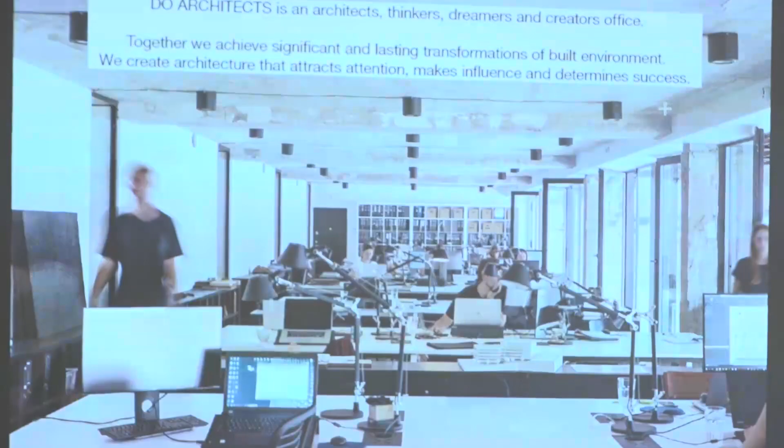So, actually the office Do Architects is the office of thinkers, architects, dreamers, and creators. We have written this motto for ourselves: together we achieve lasting transformation and significant built environments. And we try to always create architecture that attracts attention, makes influences, and determines success.

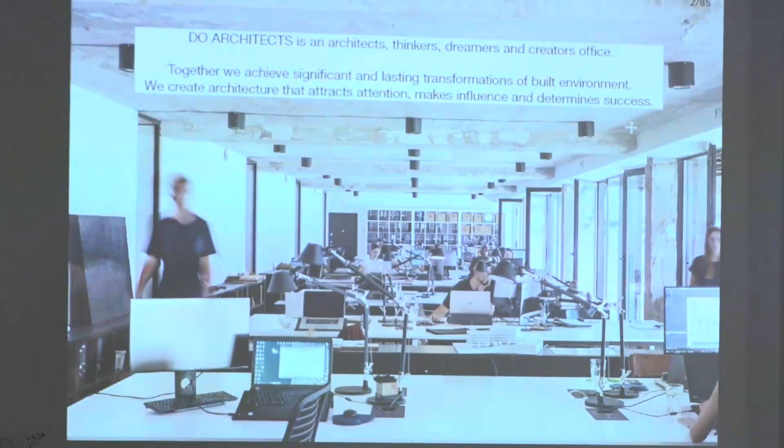Now in our office there is more than 30 people, 34 or 35 people working there. So it's quite a big company for Lithuanian scales. And I personally joined the team. I was invited to become a partner in 2015. And now my focus is more on architecture theory, on creative processes, learning processes.

I started teaching in Vilnius Technical University, teaching architecture, and I have already been invited and been a teacher in 3 workshops in 3 different countries already this year. So it's quite a new field for me, teaching others about architecture, but I find it very interesting, inspiring. You learn so many new things, rediscover some stuff, sometimes understand how easy it is to make something and how complicated it is to explain to people who have a totally different point of view. It also helps you open up your mind and try to see things from other perspectives.

Our office is, as I said, quite big, 35 people, and we're quite horizontal. Of course there are project leaders, partners, architects, assistants, but we work, as you saw in this image, this is our working space. Our office is subdivided into a couple of areas, but our office space is one big area, so everybody knows what all the rest of the people are doing at the same moment. It's quite noisy sometimes, but it helps to feel this rhythm of the office, so if you hear somebody discussing an interesting topic you can add to that, or hear something new, maybe some law that just changed. Or you could use headphones just to concentrate on work individually. Also there are some smaller rooms where you can go and work individually in total silence.

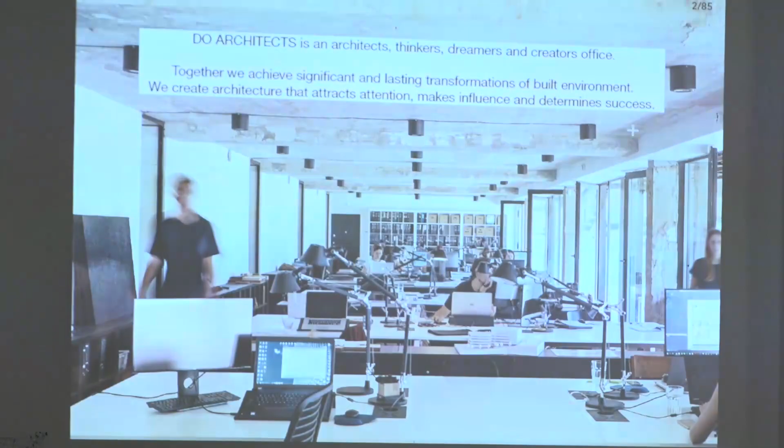And it's quite a big office, there are quite many of us, and actually the office is quite young as an architecture office, but we have already done and have been doing quite a lot of projects. Just recently, a contemporary art museum opened in Vilnius, and we were working together with Daniel Libeskind Studio to realize this project.

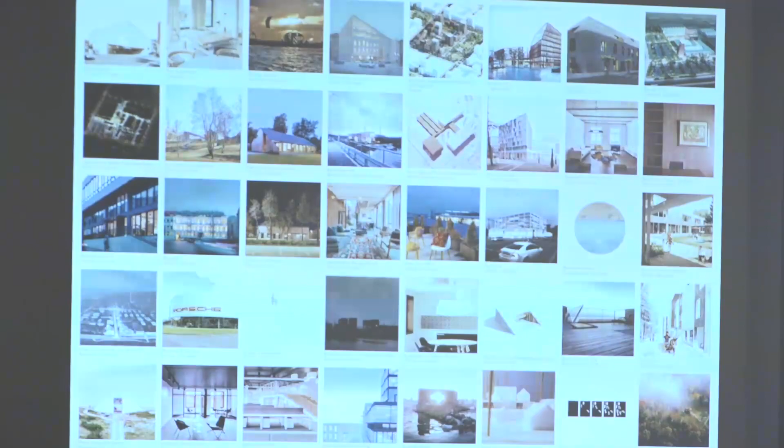But today I want to talk about existing situations and transformations of existing situations, because I think more and more these days you don't have this tabula rasa, empty sheet, where you can just build from scratch. You always have some kind of existing context, whether it's an old barn, old farm, some old Soviet building, or some kind of political context - there are so many things you have to adjust. You always have to be aware of the environment and somehow react to that in your process.

So yesterday we were discussing what I should talk about, and the girls said I should talk a little bit about the way we work, and I tried to summarize it into 4 words: honesty, authenticity, context, and love. You can also see here SML-XL, which resembles the Chrestomatic book by OMA, but it also means that we're working on all scales, from big urban development to interiors, architecture projects, and landscape projects.

As Jan Gehl said recently, the principles are quite the same whether comparing urban tissue, urban design, or interior. It's still about people - how they walk, move, and react to each other. As architects, we're designing for people, so scale is not an issue for us. We design not by rules, but by some values and principles.

Each project might be very different, but there are 4 values you have to follow. First, be honest - meaning clear and straight, so you can communicate easily, be understandable, and be someone people can trust. Always try to reply to emails, talk to people, say what the difficulties and issues are in the process.

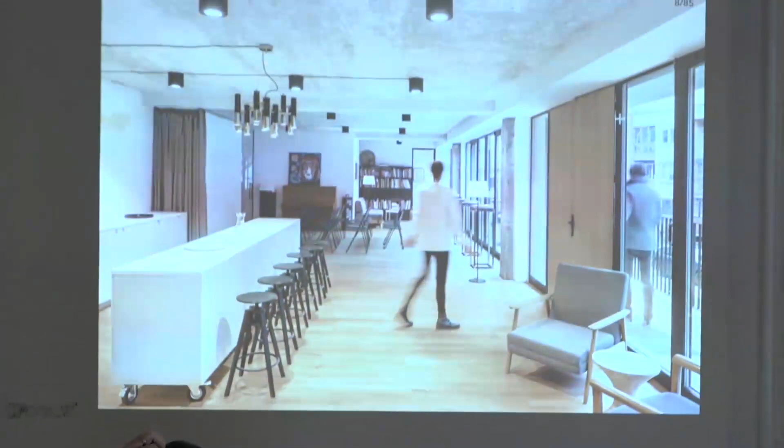So with the design, when we designed it, the idea was to leave as much as possible to show all of the imperfections. When we were doing the drawings, we noticed the building is about 50 to 60 meters in width, and across that width it's a bit tilted, so all of the pillars and everything is a bit off, and the margin was quite big actually. But in the design, all of the imperfections, all of these historic layers, we decided to keep, to show.

It was also because of economic reasons, because it's nice to see what is actually there. As an architect, we always love to see construction, structure, materials, different layers, sound, and how those real materials work, or decay, or don't decay.

But also all of the new things that were added, for example, the walls were painted only where we added new walls. If there's an existing wall or some surface that is not being touched, like ceiling or some pillars, we just leave it like that. So this was the logic behind the interior of the building, of the ground floor, and of other storeys.

And the organization of the ground floor is divided into two parts. You already saw previously the part where we're working, which is more oriented to the inner garden. And towards the street, we have the spaces where we have a bar, where you enter at the bar. So when people enter, we offer coffee immediately.

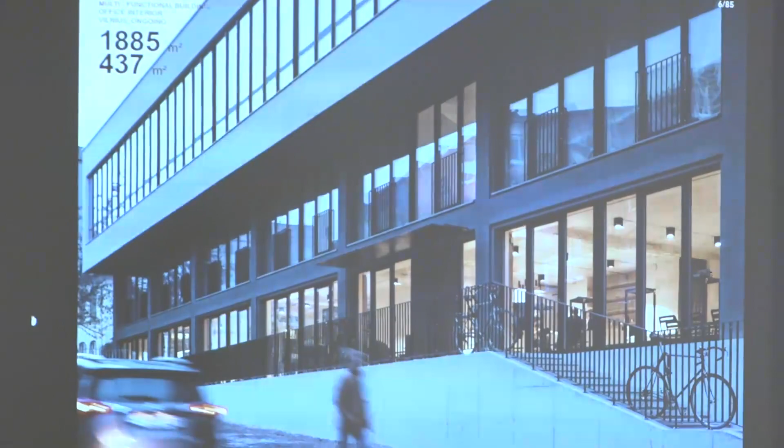It really changed the atmosphere of the street, not because people are gathering there, but because previously the street was really closed, with only this enclosed facade, almost no windows, just one entrance, some bushes, lots of cars parked. And when we did this wall of opening, somehow this interior became part of the exterior space. There used to be some homeless people who slept in those bushes next to the building.

Because the context is quite close to the station area, it's not like a fancy neighborhood. It's a normal neighborhood with real people living around it. And this opening up kind of increased the security of the area - a very interesting phenomenon. You would think the opposite would happen, maybe somebody would break in, but no, actually the street became visible.

And when you are in the street, you have a feeling like somebody is watching you. So now the street is just naturally becoming a bit cleaner. There are not so many garbages on the street because people that are passing by don't drop the garbage because they feel that because of this huge window, maybe somebody will be watching from the inside. So it kind of creates this awareness of the environment.

And I'm saying that because it's really visible. You could read that in some kind of theory books, but it really works that way - the street becomes part of your living room.

And to the other side, you can see our tables, our working spaces, and we have this terrace. This is a very interesting adjustment because we have this roof, and because of the roof, we don't need any curtains, because in the office you don't want direct sunlight since it would blind your screen. And this created two things: really nice terraces for the apartments above, and this nice terrace a bit shaded from the heavy sunlight in the summertime.

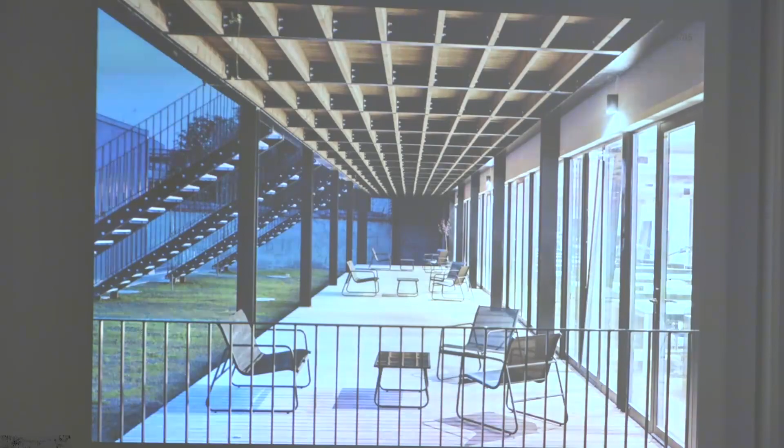You can also see the steps, because it has 3 floors plus underground with parking now. So the ground floor is for office, and 2 upper floors are for apartments. This upper floor has quite small apartments with their personal entrance from the garden. And on the 3rd floor there are a couple of lofts because the space is much bigger. They have quite high ceilings, even small patios inside, and roof terraces with already nice views towards the city.

So this is the photo of this loft with the patio, with a round staircase to the roof terrace on top.

So these are the plans, the organization. As you can see, there are 2 staircases with lifts from both sides that you can enter, or from parking, or just from the garden when you enter the premises. You can go up to those small apartments. Some of them are connected, so it becomes like a bigger living room and 2 bedrooms.

And these small ones are really tiny, like 30, 35, 40 square meters, but that's perfect for a single guy or girl to live. And actually many guys from the office are living there, so it's like also a community. You're living and then you're going down with your halat, almost from the shower to work.

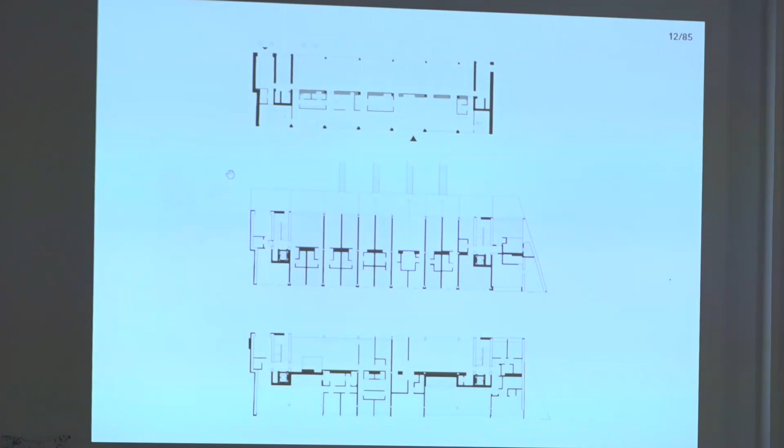Some say maybe it's a little bit too close to the office, so in the morning they take a detour, maybe just take a dog for a walk, just to have a little bit of distance from the office.

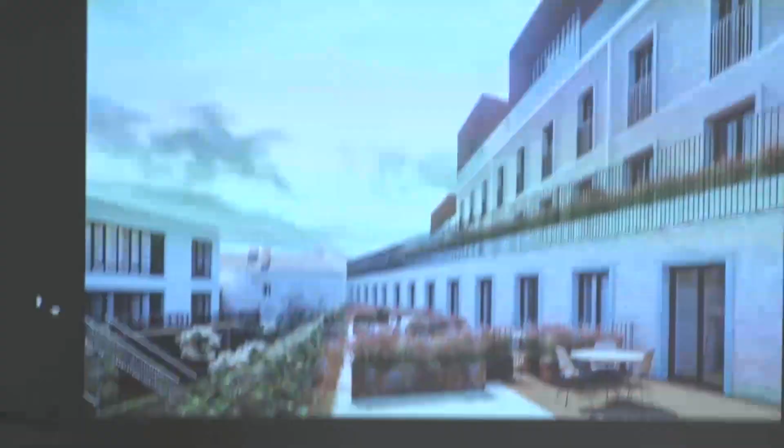And in the garden we have a second phase - this is our office, you can see here - and this will be a second phase, housing apartments in the garden. It's now being built, so it's really nice to see how everything is evolving, how all the constructors and builders are on the site doing something, or not doing something. You can always phone the person responsible and say, why is this brick there or not there? So it's really nice to see all this process in real time, in reality, like really next to you.

And this is already the next project. I want to talk about this project a little bit because actually it was my graduation project in Copenhagen, Royal Academy of Arts and Architecture there. And it's really very closely linked to what the students are doing here in the workshop that I'm in.

Together with you, in this project I try to analyze the existing situations of microrayons in Vilnius, a bit further away from the city center - how they work or don't work, and what could be adjusted, similar to what you are doing, how you can make adjustments to increase some kind of quality, to repair something.

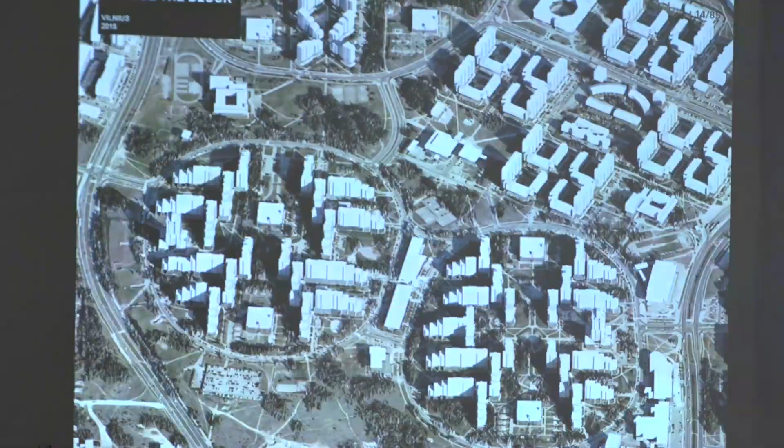So at first I was analyzing how many microrayons there are in Vilnius, Lithuania, and I found out more than 40% of buildings, the footprint of the built environment, are actually those standard prefabricated mass housing elements. That means that if you find some kind of unlocking formula for how you can transform one, it could be applied to 40% of this mass in Vilnius.

And my study and interest was the Pašilaičiai rayon because of its very odd urban shape. It has 3 rings with housing inside, and then a 4th one because it was designed in 86, 88, so it was already at this perestroika moment, transforming into independence. So you can already see the hints of closed gardens inside and perimeters and smaller streets, whereas the others are just standard, with generic green and a ring of road around.

So for me it was quite interesting to analyze that, because before I was working in the Netherlands with Max, maybe some of you saw on Facebook some guys like Jason or Hiroki. We were working together on many different urban and architectural projects all around the world.

And actually some microrayons that I found in Vilnius were quite unusual forms and shapes that you couldn't see anywhere else. So I had this fascination with how it works, why it was built, and what could be done to increase the qualities in the future.

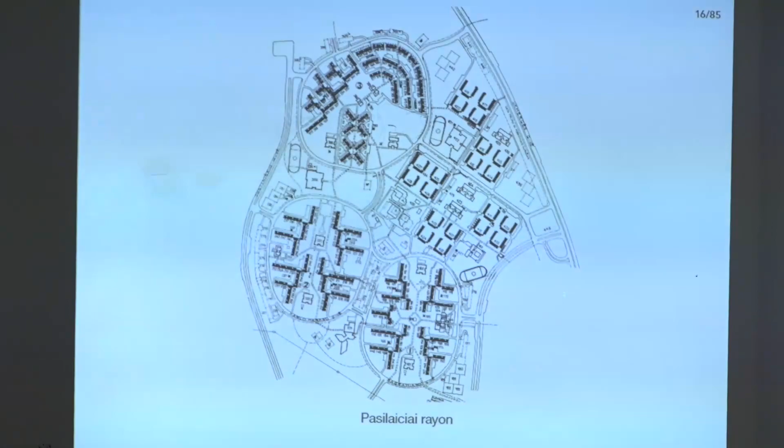Of course, I did a small analysis to compare how it actually looks.

Before moving to Copenhagen to do this work, I was living and working in the Netherlands, and at that time Bijlmer was very fashionable for doing projects. Architects from Amsterdam, NL Architects, even won the Mies van der Rohe award for a project in the Bijlmer territory in Amsterdam. It was a huge mass housing area designed in the 60s, and there were many crises.

Basically in the 90s and 2000s, those big buildings were being demolished and transformed into something much simpler. So for me it was interesting to analyze whether this microrayon Pašilaičiai would become something similar in the future, like a big ghetto of maybe immigrants or criminals, like it happened in the Netherlands, in Amsterdam, in this Bijlmer territory.

But actually what was interesting was comparing it with the city center. Even though the density is smaller than the city center, the people living there are quite similar in income status, family status, and education. The nationality mix is also quite similar - you can see more Lithuanians than in the city center, but still it's not really homogeneous.

So, lack of functions. Of course, parking is a problem nowadays, but when it was planned, the amount of parking was just too little. It was planned at, I'm afraid to lie, but I think 0.75 cars per apartment. And nowadays, of course, each apartment has at least 1.2 cars, because the parents, father and wife, each have a car, or maybe one of the children already has a car.

So there are so many cars in all of these areas around housing. Then, apartment layout: usually, for example, in this area there is only one type, a 120V type apartment, and the majority of the apartments are exactly the same. So there's no variation of possibilities to pick what you would like, where you would like to live. Plus, the rooms are really divided and it's very hard to connect rooms like kitchen and living space because of the construction. So it's also small rooms which are subdivided inside.

Now, what the government is doing is there's a strategy to insulate all of the housing and change the piping. It's kind of a national strategy. So the majority of those houses now are being insulated, but it's only a very small aesthetical fix, just a makeup for the face to add extra insulation on top, without thinking about those problematic issues that are actually at the core of those neighborhoods.

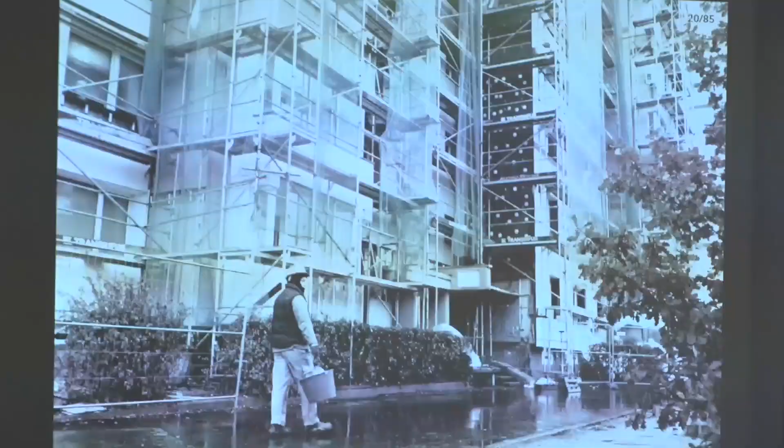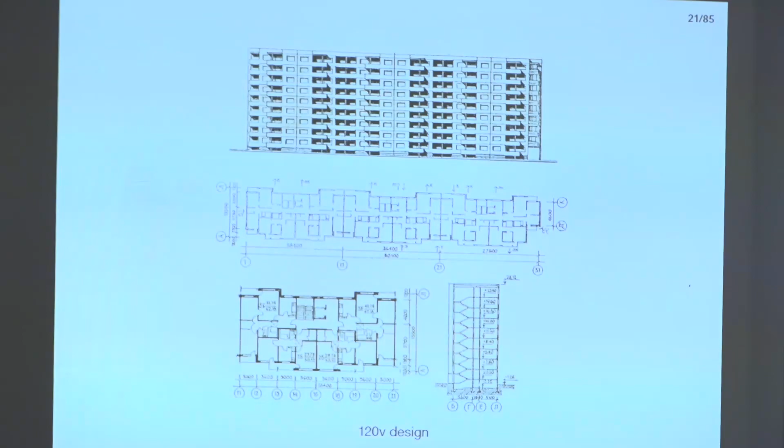Yeah, so for example, like this. And as I said, the majority of apartments are 1 or 2 types. So there's no diversity, so people don't have the possibility to choose whether to live in a bigger or smaller apartment. These are more or less the wishes.

I was talking with the city architect and some other experts, and I came out with 6 criteria that should be a driving force for the project. So, of course, quality - because when it was constructed in the 80s and 90s, the quality wasn't that high. For example, the concrete or some windows - the quality of materials was quite poor. So spatial quality should be increased.

Then we need to add variation of program, so it's not only one type of apartment, but we have maybe apartments, offices on the ground floor, something on the roof - variations so people could choose and create their own living spaces to their liking. Public space is also an issue - how you can transform these parking spaces and have some nice parks so people could play, feel safe, and be visible.

And a kind of controlled environment, because now with an open plan, anybody can just cross through. So how to make those neighborhoods a bit safer and a little bit enclosed, so you would have public spaces like on streets, semi-public spaces in the courtyards, almost-public almost-private spaces in a staircase or smaller place, and your own private balcony. So we would have this gradation of spaces, from really open to closed.

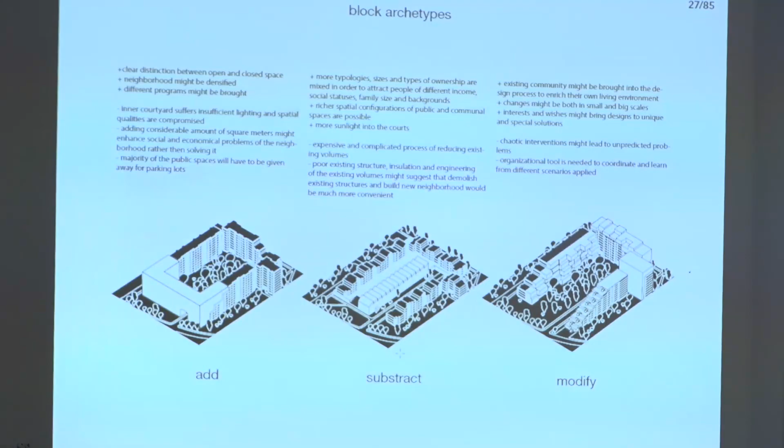The study site was one of the apartment blocks, and there were different strategies. I won't go into depth, but because of the students and this project, I want to show how we approached adjustments to the building.

Together with constructors who helped work on this project, we discovered that probably the weakest part of the structure is the connections, because when you connect, you're also adding metal structure and wiring. So if you try to remove elements, especially from the middle rather than the top, the whole system might just collapse. You really can't touch the structure, because it's like a house of cards.

Another thing - this is an interpretation of Le Corbusier's Domino House, his graduation project, where he proposed slabs and pillars so you could have an open plan inside. That meant if the building changed function in the future, you could adjust - at the beginning it could be a house, then become an office, because you just reconfigure the walls, since the slabs and walls are a separate thing.

But with this structure, you don't have that possibility of freedom. It's really fixed - the room organization is fixed. So how do you achieve this diversity?

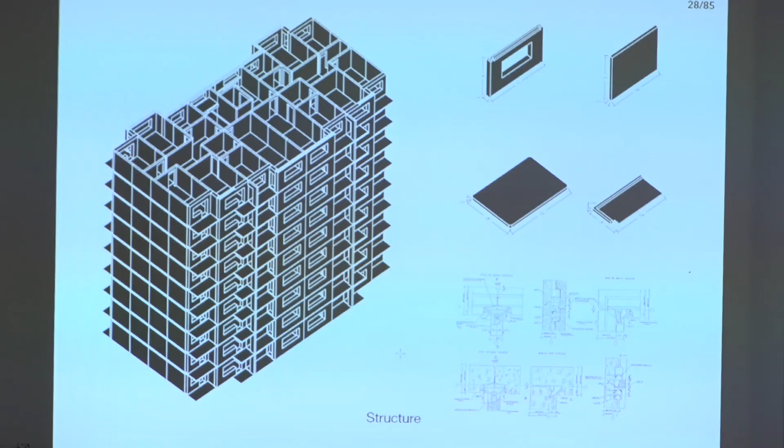In Western cities like Amsterdam, it's quite easy for the government and huge developers to demolish buildings like that, because the majority of apartments are rented, not sold. In Lithuania, in this case, all of the apartments are private. So as a big developer, if you want to redevelop those sites, you have to buy all the apartments from the people, demolish it, and then build something new - super expensive, really not affordable to this day.

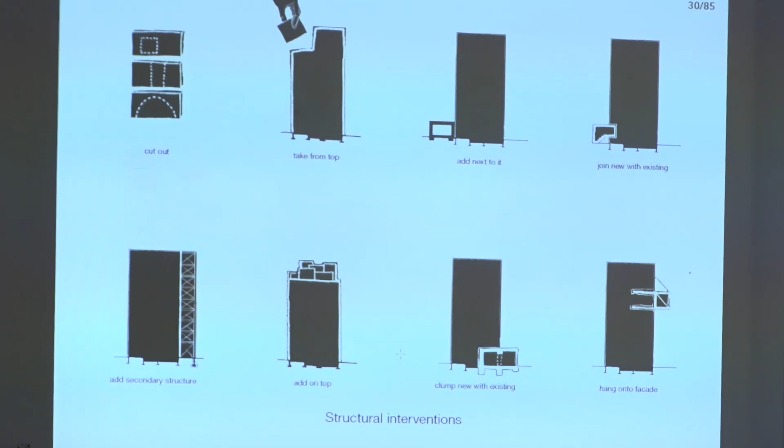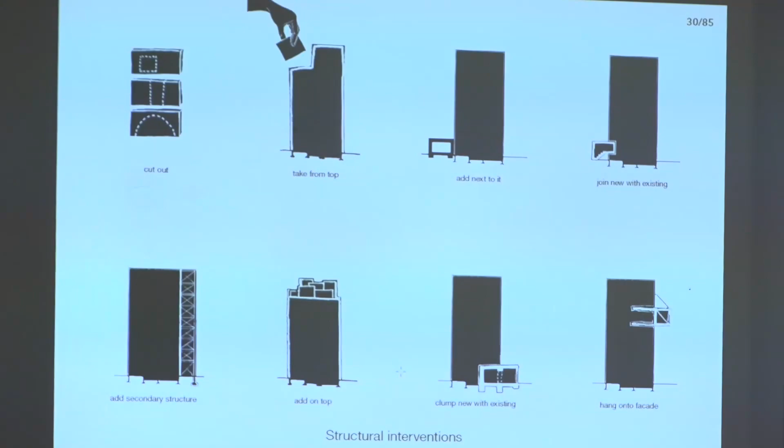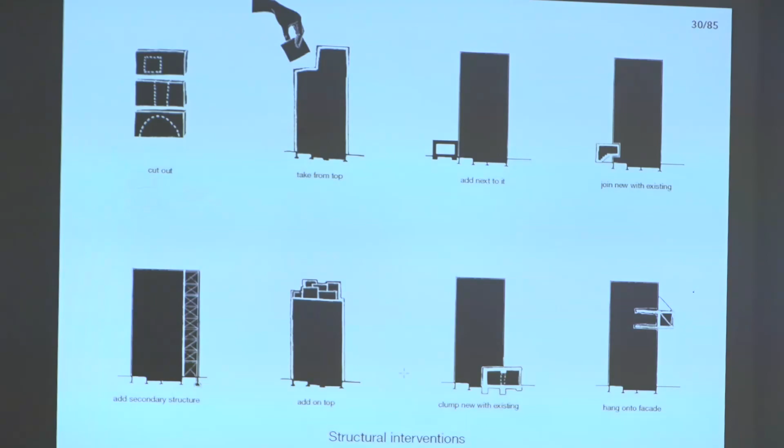So how can you transform it with what you have? If you can't do big steps, maybe you can make small adjustments - cut out small parts of this concrete element, or take something from the top and build next to it, or just put something next to the wall. You can add a secondary light metal structure, or put a light structure on top, because it was actually designed to be 5 to 9 stories tall, so the structure should hold quite heavy weight. Or even hang something extremely light on the facades.

Based on those eight principles, I came up with a toolbox for how you could attack the ground floor and the entrance, because one of the issues is how you enter. As I mentioned before, there are steps going up. Usually there are elevators, but to get to them you have to climb 12 steps, so for disabled people it's impossible to reach the elevator, which is funny.

Then there are garbage bins in front of the entrance, so it's always smelly. There's no place to keep bikes, and you don't want to be there because it smells. There's no bench to sit and see your neighbors. So one of the things is how do you enter the building - how can you clean up the space, maybe make a bigger foyer, and put the garbage underground, giving more space underground and a nicer premises.

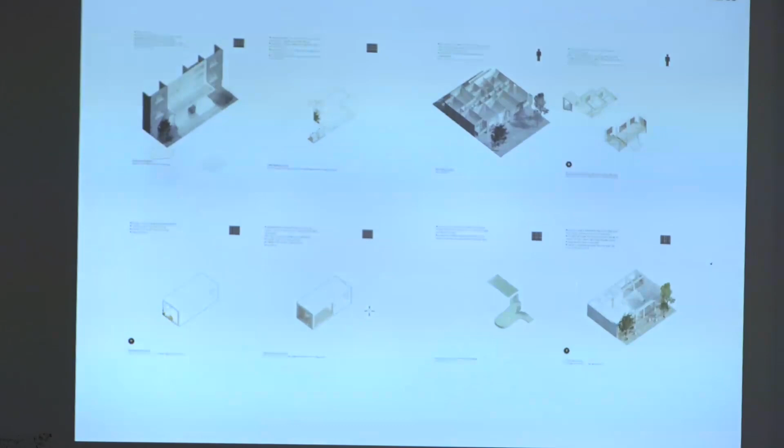Then the ground floor. There are already some hairdresser stores or small offices on the ground floors, even here I think, but how do you enhance it? Maybe you can add extra entrances, bigger terraces, or some ramps so disabled people could actually enter the lifts in the middle.

If necessary, sometimes it's possible to transform the ground floor with extra construction, extra structure for some kind of community space, because the staircases and halls are quite narrow. There's no place for people to gather, and there are quite a lot of neighbors. You don't get to know your neighbor, and therefore you don't feel safe in your staircase when you don't know who's living next to you. It's very connected actually - to feel safe, you have to know your environment, you have to know your neighbors.

So for example, as one of the toolbox ideas, maybe add some kind of community space for them to gather, maybe to watch a movie or play ping pong or something like that.

Then there are adjustments on the top. You'll see in the images later, as I showed before, it's terraced, but those roof terraces aren't being used. So a very simple thing, you could just make some openings and already have a terrace, or do something more - maybe a community space on the top floor, or even some steps so it would become an extra apartment, office space, or penthouse on top with beautiful views.

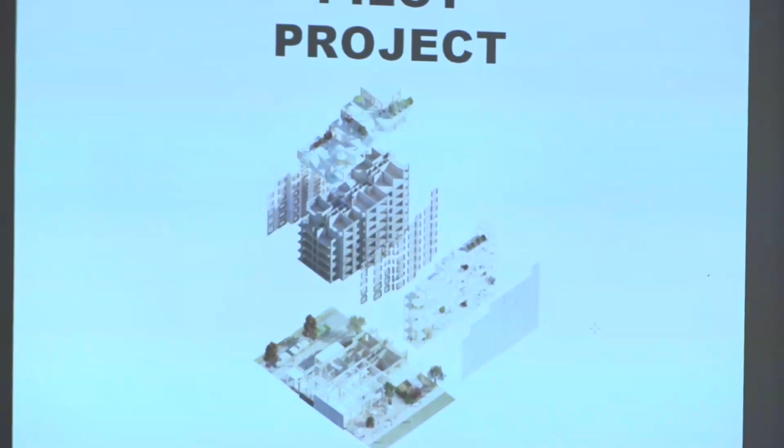From this catalog of toolboxes, there were more, but those were the main ones. There was a pilot project just to show how it could look. So one of the aspects was the ground floor, how you can reconnect the building with the surroundings.

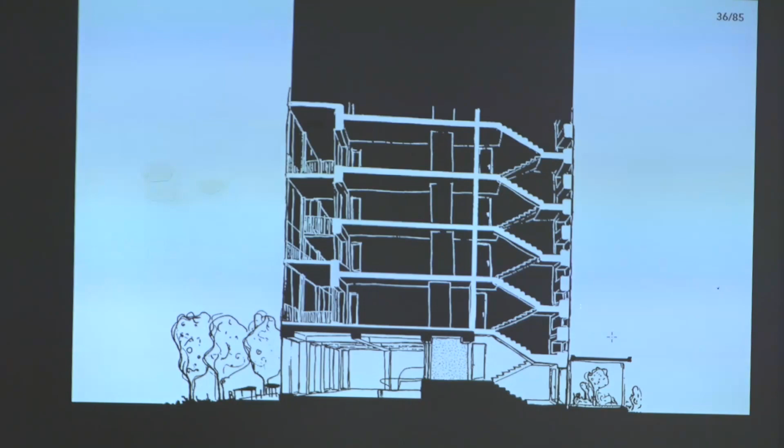Another thing is you have parking on one side, but the garden is on the other side, so from the balcony you can see the garden but you can never enter it. You always have to go around the building, and usually it's not just the one building but the big structure. So if you want to go to your garden, which you are seeing, you have to walk like 10 minutes around the block to get there. So how can you easily access it?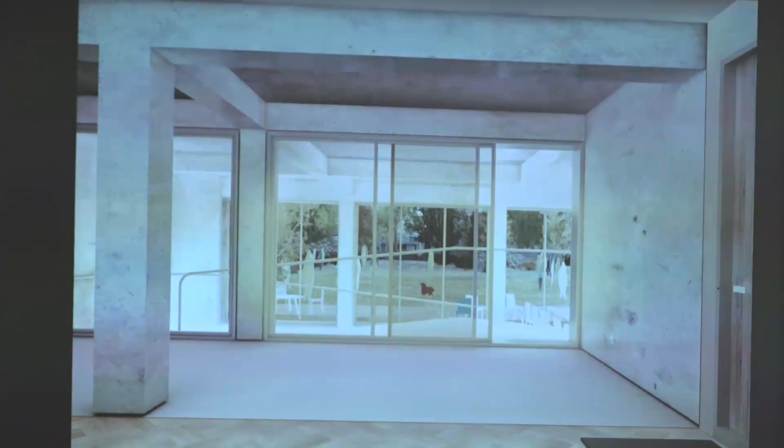So if you're entering the staircase, one idea was you get rid of one room from one apartment on the ground floor and have this connection to the park, which is to the south, and you can even have a ramp to get to the lift.

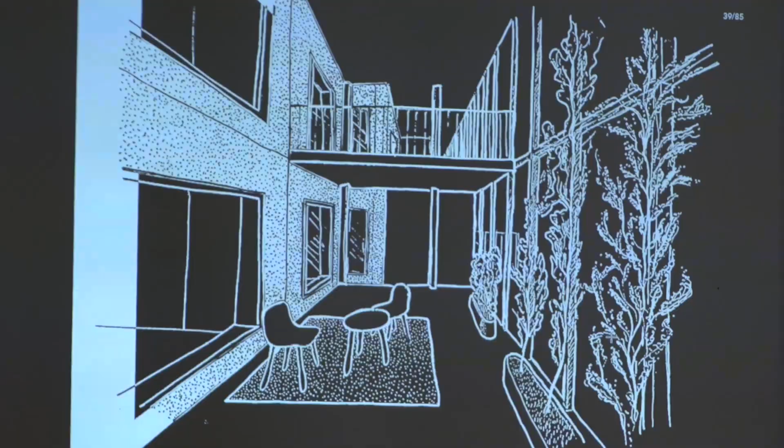Then another thing is, instead of just insulating the facade, you could extend it and have extra balconies, and those balconies would become some kind of extra living space, maybe a dynamic space - maybe somebody wants more and somebody less. Plus it creates this double facade system that in the summertime you can open up and ventilate.

In the wintertime you can close it, and it works like a heater, because during the wintertime, if the sun is shining, it kind of heats up the space. It's like it could work as a thermos in some way.

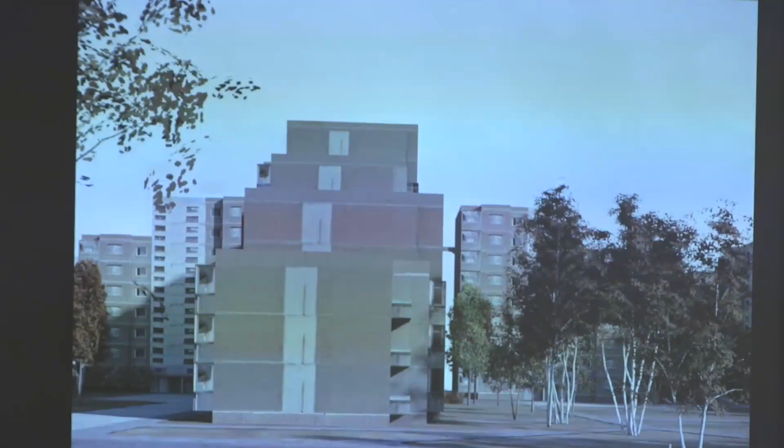And of course on the ground floor, maybe some of the functions go down so they actually touch the garden. On the roof, because it was sloping, the idea was somehow to have extra facilities on top, maybe even create an extra staircase, also for fire escape reasons, but also to have nice apartments or even office spaces on top with beautiful views towards the park.

So this was the way you could just find some difficulties and issues and tackle them, trying to solve them in creative, fun ways.

This was my academic project, but maybe in the future it will evolve into something, maybe with some of you, I don't know. I'm just sharing it because I don't like what is happening, just insulating those old micro-rayons. I think something more should be done, and if it's possible to find a way to reconfigure this code without demolishing and building something new, that could be really game-changing for the majority of cities. Only in Vilnius there is 40% of buildings like that, so it's quite a big mess.

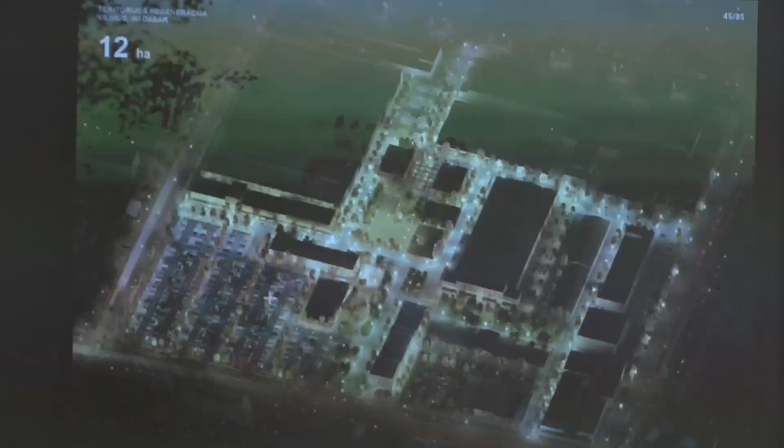Talking about urban design, this is Ogmios territory, an area that we as an office have been working on for the last 10 years.

I've written something down. What's interesting is that during the first strikes and meetings for independence in 88, 89, next to the Lithuanian parliament and TV tower, all of the tanks were actually coming from this side because it was a military base, with warehouses and repair shops. This was Šiaurės miestelis, mainly concrete warehouses for different factories, but also military uses.

Now it's very funny to see how it actually transformed from this negative aura to a place where people would come on the weekend just to hang out and spend time. For example, one of the streets here.

I have a small text I want to read because it's quite poetic: you might think that only an old town has its identity, that creative process happens in theaters and museums, and beautiful living is only possible in your own home. But when you put your own creative ambition into a drawer and start observing people, you start to see that by not building, not demolishing, but adopting, adjusting, rescaling, resizing, you can find a change in the environment.

The developers realized that instead of demolishing everything and building from scratch, you somehow have to adjust. At the beginning, they were using existing warehouses for local markets and stuff. By time it just grew naturally, and now it's already transforming for the last 3 years, but the process of designing was happening for the last 10 years.

It's really nice how the developer sees that it's important to draw 10 times. We say it's 9 times measure and just a 10th time cut. With this area, there are so many adjustments, so many different projects being done, so many proposals, and it's really those lots of subtle changes that increase the quality.

We're doing this master plan of the whole area, but also realization of some new buildings in the area. So every day, every week, there are conceptual meetings about the overall process and progress of the territory, but at the same time there are different meetings about exactly how construction sites, how the exact detail has to be detailed and what has to be delivered where. It's a very continuous, very iterative process.

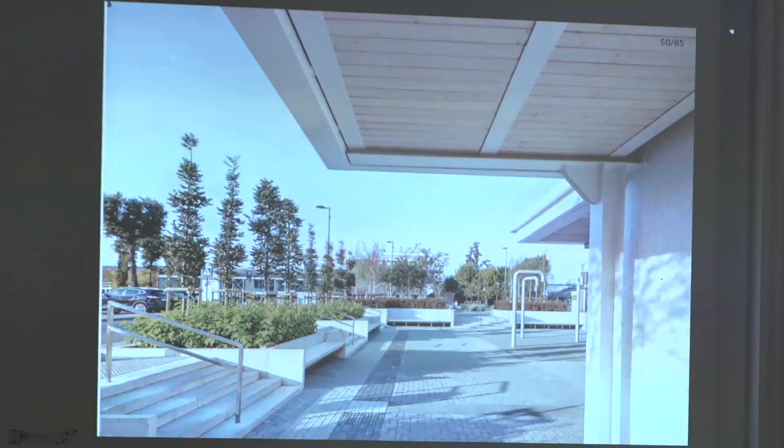What's interesting is that in a way this resembles the old town, because in the old town, if there's construction on one building and you just close the facade, the street is still a living street. There are still many other shops, and people are still passing by, and you just don't notice if there is a construction site. So it's something like that happening here.

Some buildings are modifying, changing. We always try to keep the existing, not to demolish, but somehow to adjust, to reskin. Even in this building, when it was being renovated and instead of just a basement, a ground floor was added, all of the floors above were still working because they were rented as working places, and during the whole construction, the guys were still running their offices.

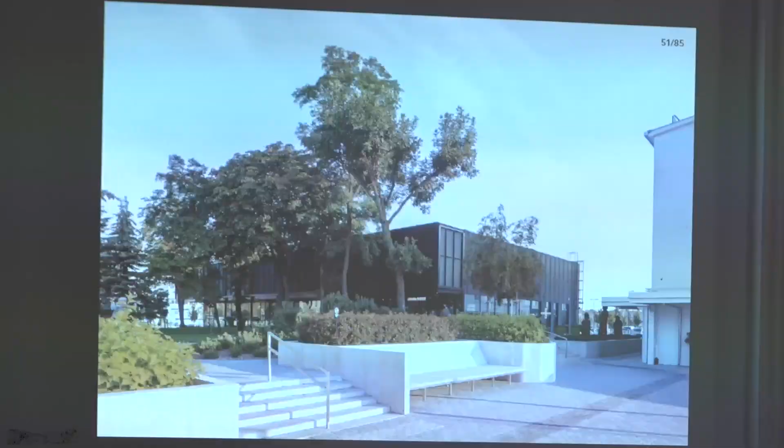And to this day, maybe this project will continue for the upcoming 10 or 15 years, who knows, but already now you can see the change. And for us, as I said, it was really important to have public space design, spaces for people, parks, terraces. The clients really appreciate that. They really want to keep every tree possible on the site, and they want to add as many trees as possible.

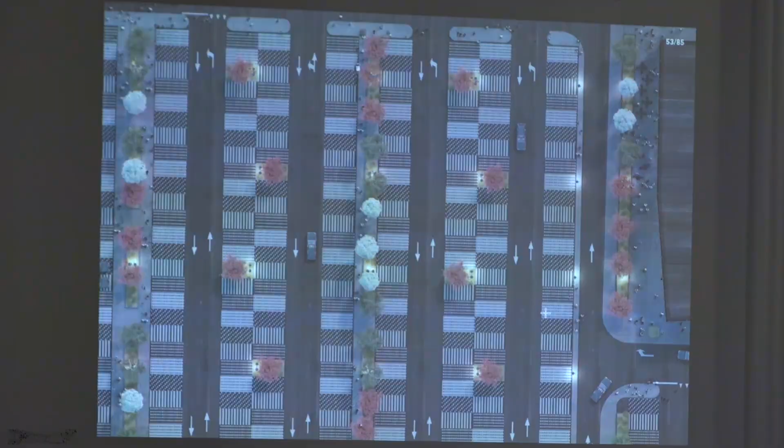So even parking - if previously there was a habit of having a huge parking lot in front of the entrance to a shop, in this project the parking was designed further away, so you have to leave your car and walk. This walking created possibilities for smaller pavilions and cafeterias, because especially on weekends, it's really nice to come with your children, leave the car a bit further away, go shopping, but also stay here.

And it's not only shops that are there. There's now a kindergarten, a TV station, and some spaces being rented for smaller or bigger offices. The only thing not in the area is housing, but all the rest of the functions are already there or are being planned for the future.

For example, in the studio, one student introduced the idea of connection - of opening up and seeing different processes, like the postal office, the warehouse, and the technical facilities.

We had a similar idea in this pavilion - inside there are 4 different renters, different cafeterias, different restaurants, but the walls between them have to be glass, so you always see the presence of people.

Because in streets and cities there is, I think, one major rule - that people attract people, and people gather people. So if you think about people, you think about how to create spaces for people, how to make nicer spaces for people. If there's somebody sitting next to the window in a cafeteria, that couple or those people sitting there will attract more people to come to the cafeteria. It's a common rule for cafeterias, but it's very common for people in general - you like to hang out in spaces where you can see many people, and you don't like spaces where it's empty, cold, and nobody's around.

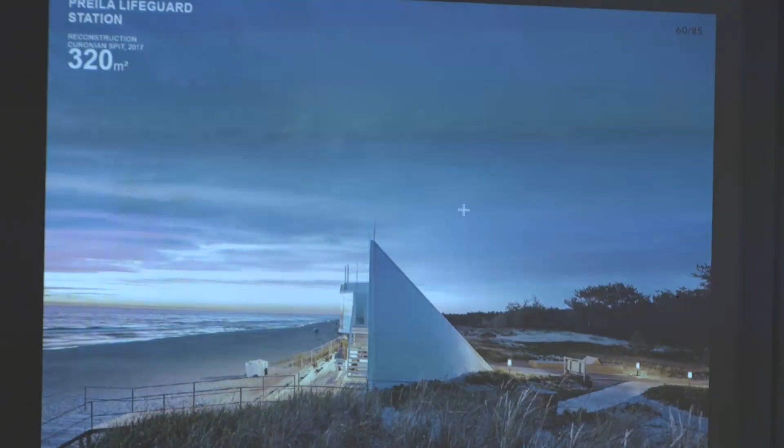Next by the sea, next to the Curonian Spit, in this small peninsula by the Baltic Sea. It was built in the 70s as a lifeguard station, and it was again abandoned for so many years. There is an image before and after, closed and abandoned.

We did a design to propose to restore it as a lifeguard station, but also to introduce some functions, like a cafeteria, so it attracts attention and attracts people. It's not only an aesthetic thing, but also a functional thing. You would want to come there to have a warm tea if it's windy, or a beer if it's hot.

Plus, an extra thing was this huge terrace. In the summer, it's nice to have some events, and these steps could be transformed into a stage.

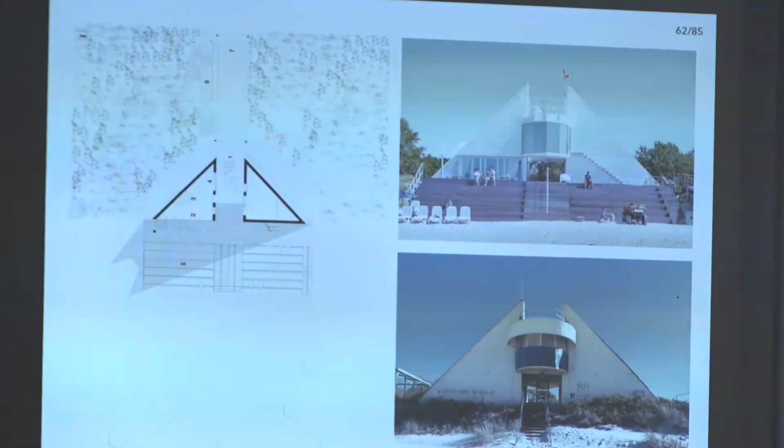This is from the lifeguard's room, just a clean facade. Afterwards, when it was finished, local surfers used it for different events, and it was one of the first events where professionals taught amateurs how to surf, with bands playing on the steps. This building created an atmosphere in the area.

It wasn't just a small renovation of what needed to be done, because originally the project just called for a renovation so the lifeguard could be there. But we wanted to bring extra things like this cafeteria or these steps, to have the possibility to use it functionally in different ways.

Another project of ours where we try to play with the existing context. The white one is the kindergarten. We have a couple of types of kindergartens made in Soviet times. There aren't so many of them, and one of the types is this one.

This kindergarten asked for an extension to have some extra classes. But we wanted a challenge with that, not just to add extra classes outside, but somehow to clean up and increase the quality of the kindergarten itself.

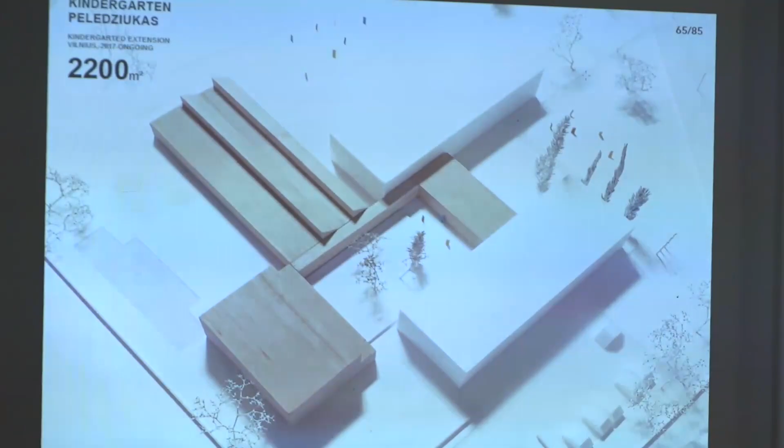When we were studying the existing floor plan, we found out that this is how it looks. Teachers themselves put all of those things together, and parents help maintain it well, so the landscape looks well maintained, but they don't have enough space. There are so many corridors inside those kindergartens, and no space for people to gather, no sport hall.

Also, there is no activity hall where they would have meetings or gatherings like Christmas, the 1st of September, and so on. Or they have to do it outside or in their classrooms.

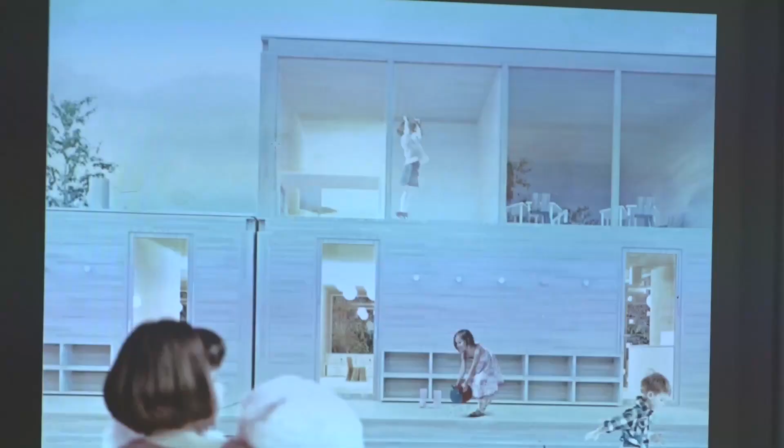So with our design we wanted to propose extending some corridors into bigger spaces, so it would become more than just a corridor, like an amphitheater which you could use in summer and winter. Instead of corridors, you'd have wider spaces with hangers and changing rooms, so even kids who don't want to stay inside the class could use this space for running, playing, being there.

We also wanted to create an enclosed space, because as I said previously with the housing projects, also with the kindergartens, sure you have a fence around, but the public space around the building is really open. So how do you create this intimate space where teachers would be calm, knowing people would play safely without any risks.

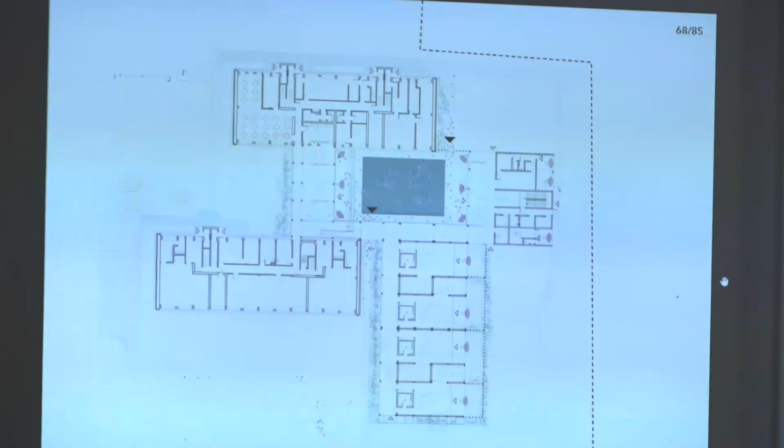For example, when I was living in the Netherlands, there were stories that some kids were kidnapped from kindergartens there, horrible stories. In Lithuania, we don't have those stories yet, but you never know.

So we create spaces like this inside patio, maybe with this bigger corridor which could transform into a bigger hall for events, and corridors which could be playing spaces for kids.

Classrooms with glass to the floor, so the kid actually— another big thing is that all of the windows in those classrooms are 1.10 meters, above the radiator, and the kid, being really small, doesn't see through the window, doesn't see what's happening outside, just the sky.

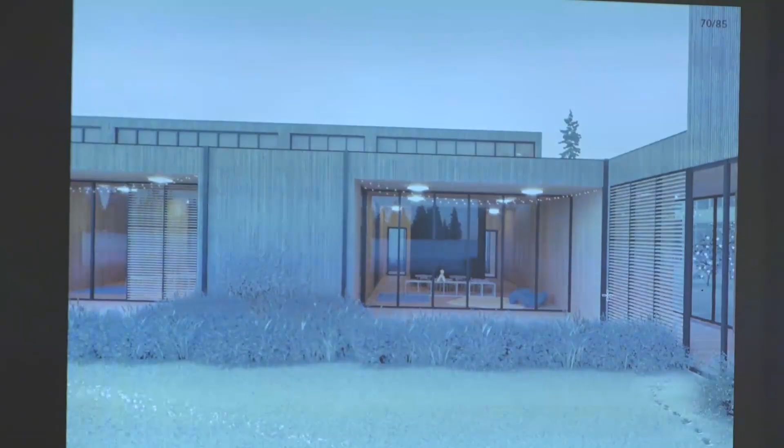When you're designing a kindergarten, you have to think about the kid. Instead of standing next to the window, maybe he can actually see the grass, see this beetle going on the grass, walking there, and touch the real materials.

We wanted to make it out of wood, and our ambition was to make everything out of wood—constructions out of wood, all surfaces out of natural wood, not some kind of laminated things. Now we're in the process of having all of those agreements, and most probably we'll have everything out of wood.

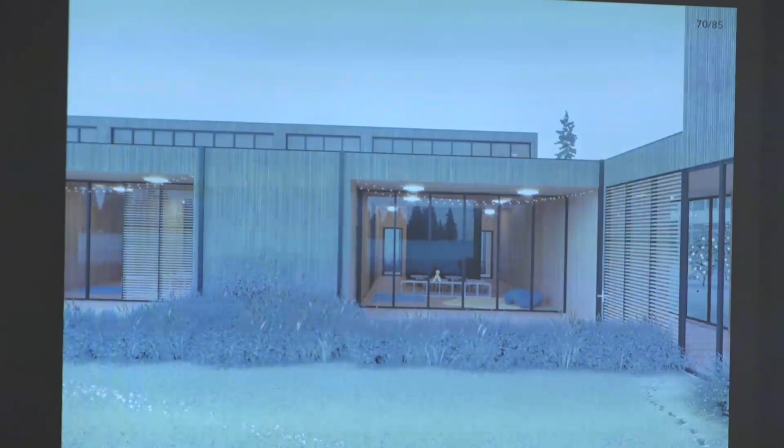So this is still being developed, and this is the classroom because it's quite deep. It's really important to have this connection to the outside, so every class has a nice outside terrace plus lots of sunlight. So the desk, the working area, is always lit, and this playground area is always lit.

Talking about transformations, this is another project of ours, quite an old one. It's the project that we got in Lithuania. Every 2 years there's a competition for the best project, and it got an award for one of the 5 best projects in Lithuania at that time, and was also nominated for Mies van der Rohe. It's just a container city.

Even to this day we're working on this master plan. Before, at the beginning of today's lecture, I mentioned we had this other office, Andrea Balde, partner of DO Architects. When she was studying in the Netherlands, she worked with Karres en Brands landscape office on this master plan, and when she came back to Lithuania, she just continued to work on it. So it was, and still is, one of the first projects of ours.

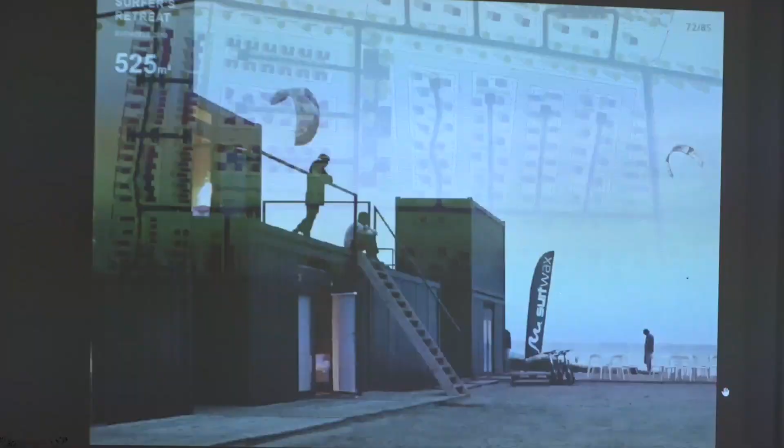What is really interesting about that site is that the water is very shallow, only 40 centimeters deep in many places, so it's a perfect spot for learning to kitesurf. It's also very windy, so it's really a perfect spot for kitesurfers.

Before there were any containers, just enthusiasts would come there with cars and tents. During bad, stormy weather, the wife with the kid would sit in the back, and the husband would change and go surf, while the wife would just read a book with the engine on because it's cold and rainy outside. There was some kind of culture around that, and we thought that by putting those containers there, it could be a first step to show the potential of this territory, to invite more people, and also to provide better infrastructure for those who like to surf.

So it's like a setup of containers with a cafeteria, a nice restaurant, showers, living spaces, and sleeping units. It's very simple, very cheap. The furniture is from IKEA, and the interior is nothing special, because of course the most important thing is the surfing itself.

Nice food in the restaurant, just feeling cozy and warm. It's not about aesthetical things, it's about really feeling happy doing that.

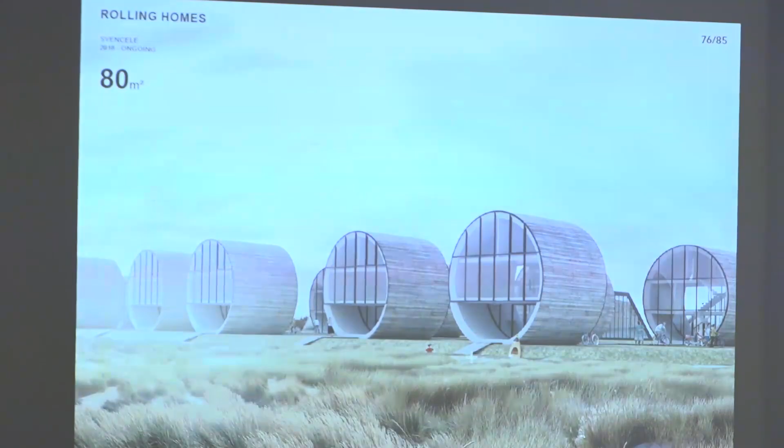So it was the first project there, and because of the evolution of the project and many of its parts—before the lecture I mentioned there are 4 things driving us: honesty, authenticity, context, and love. This project is driven by love.

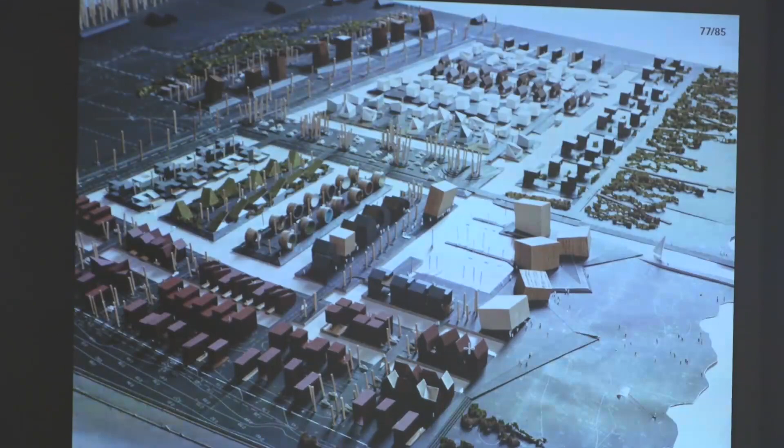At the very beginning, when the master plan of the territory was being developed, we wanted to show different areas with different symbols and schemes, because if you showed them just as a mass, you would think it would all be the same house. So we wanted to show that the architects who design those buildings have to be different, and aesthetically, how they look, has to be different too. So we chose different shapes to show that.

It so happened that one of those was just a round shape in the model. And when there was a presentation to the client, they saw it and said, 'oh nice, very interesting building, maybe I would like to live in it. Maybe something interesting would come out of this model.'

And then we thought to ourselves, why not? Maybe it's something real, because we started playing with the floor plans of it, and it kind of has a logic to it.

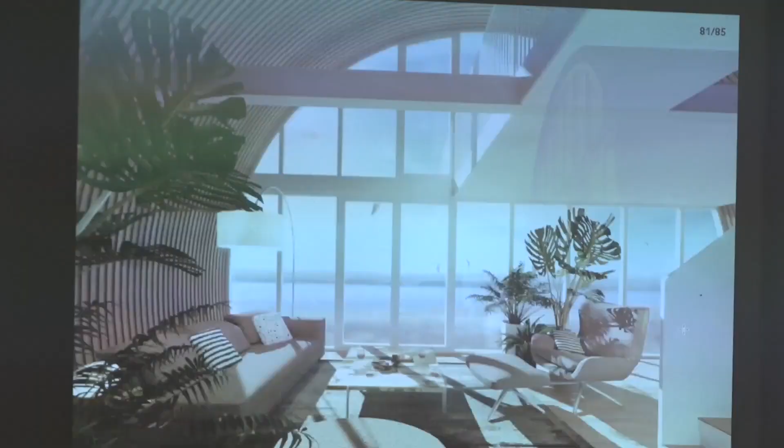On the ground floor, we have the entrance under the roof and a place to keep your kite or equipment after surfing. Then you go up the stairs to the upper floor, a living space with a beautiful view because you're higher up, so you can see towards the lagoon. In the attic on the top floor, you have your bed, the sleeping unit.

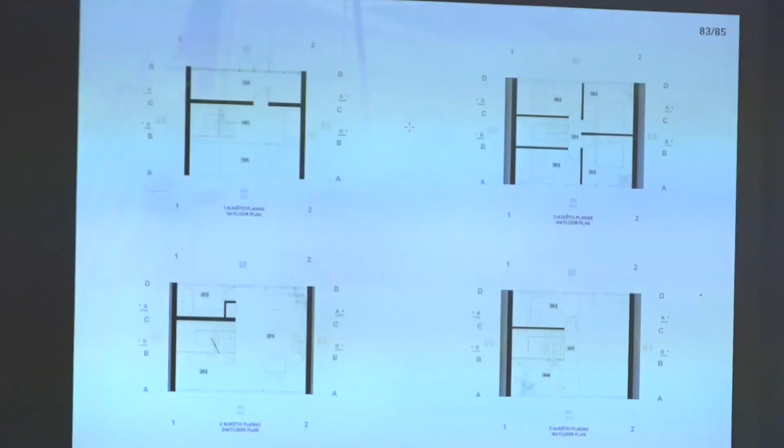So this design was not driven mainly by function, logic, and economy of the project, though of course we focus on that first. This project was driven by love, by shape, by form.

At the beginning, when we were just working on plans, we did some renders and released them on our website. It was very quickly seen and picked up by different media around the world. We even got phone calls from China or India asking if we could sell them the plans so they could copy it and build somewhere in China. It showed the interest people had in this project as a form.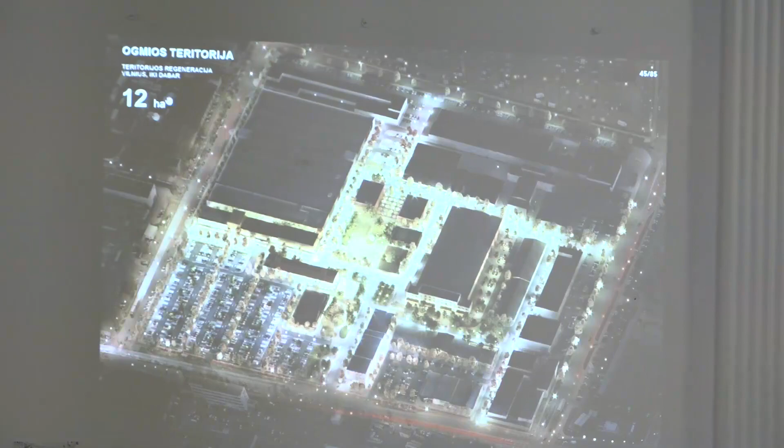Next slide? Yeah, and here, like in this one you can see a little bit. As I said, it's mainly industrial areas. There is a huge shopping mall here to the north - actually to the west, this is the north side. Some old factories are now being transformed into warehouses, they sell building materials there in those premises. This is a huge mall for furniture. These are also some small different types of shops where you just go by car to buy maybe tires or something. So it's kind of this post-industrial neighborhood, and a bit further away to this side there are living units, also like this Soviet microrayon a bit after this shopping mall.

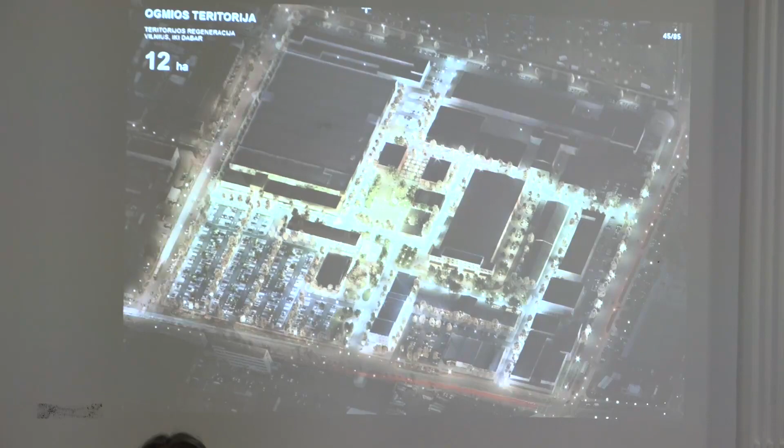It's interesting what is going on there, and how did you consider them in your project? I mean, now it looks like this district looks so bright and so attractive, and it's a render - what is going on around, in this case? Yeah, no, it is like that - all those people will go here, and those districts, all those areas around, they might be dead in a way, if we are talking about public spaces, if all people will be attracted here. And I'm sorry for such a provocative question, but no, it's not.

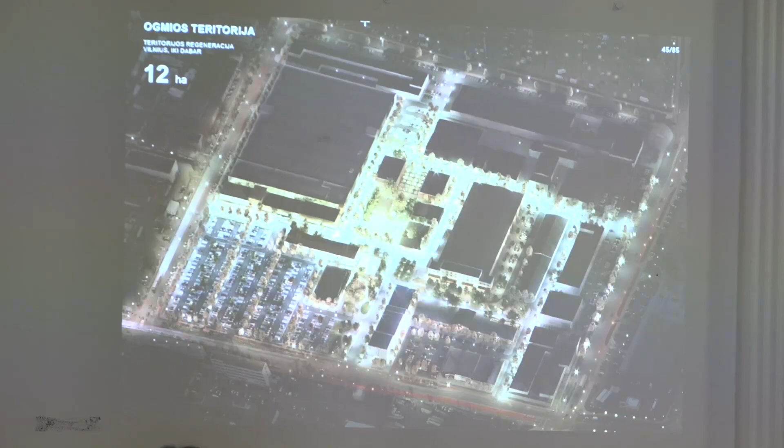No, but the context is way much bigger than the closed premises. The context is, I think, the whole city of Vilnius now, because you can choose where to go, and there are so many different places, but you would probably go to the city center on the weekend to spend some time. But now you can see a tendency that people are actually deciding to go there, because there they can - there are some nice restaurants, there is a kindergarten where they can keep their kids, there is even a zoo in this area. So it has all of the amenities that the family might want, for example, on the weekend. And also there are some retail outlet stores which are cheaper than somewhere in the city center. So I think you can choose where to go. And this is one of the places, and because it just has high quality spaces and nice functions, it attracts people. And in these close neighborhoods, anyhow, there are none - I mean, it didn't take any people from this block, because there were no people in the first place there, so there were no people to take from there.

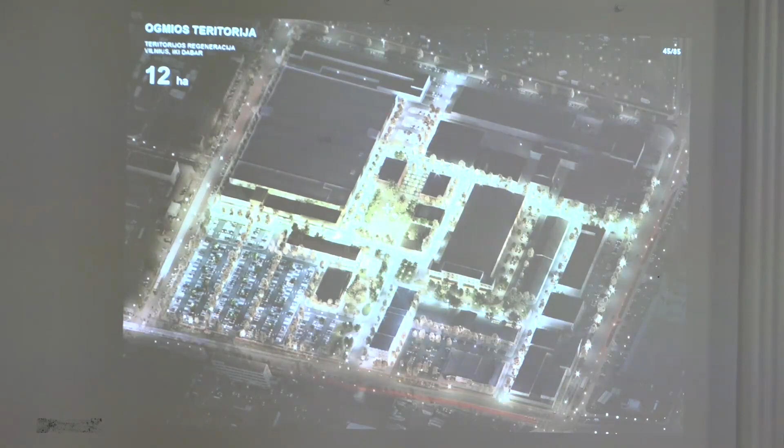But in the bigger scale, it's quite funny when you see it from the bigger perspective, because around it, it's all asphalt, concrete. There are even not so many bus stops which actually stop next to this area. But because of those warehouses, it's quite cheap to rent them, so young companies like IT companies have their own office somewhere nearby, and they come here to eat something during lunch or after work in the evening. So it creates this effect of growth around it.

I'm just afraid that the ground floors around all those areas might not have any chance to have their shops or workshops, or any public spaces, and be more lively, because all people will go here to this district, and those other areas, they will just live in, and we have this dangerous situation already in Kharkiv. How does it work here? Because we're about to do a project quite close to this area, also about a building and its public space premises next to it. It's kind of when you see that it works somewhere else, you also want to have something similar closer to you.